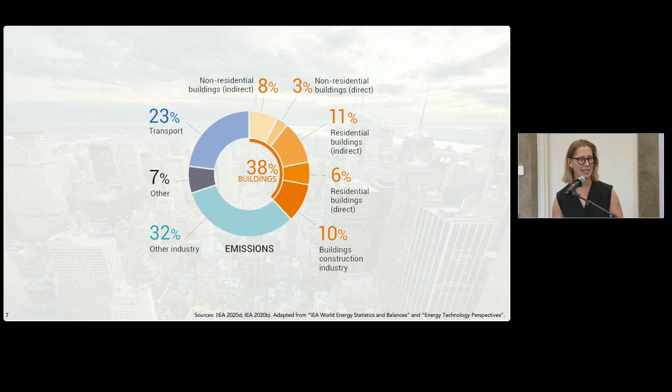So when it comes to problem solving and eating, I like to go for the biggest slice of the pie. So we've seen this statistic before, but I'd like to remind you that 38% of global energy-related emissions come from buildings. And within that 38%, 70% of those emissions come from heating, cooling, and lighting buildings. So although it might not always be the sexiest of topic areas, this is one of the reasons why I focus on this area, because we still have a lot of work to do.

So I care about energy in buildings, but is it specifically energy that we care about, or is it something else? Is it the greenhouse gas emissions that come from the way that we source much of our energy that we use today in buildings? Is it utility costs? After all, if we weren't spending this money on energy, we could be spending it on a lot of other things for humanity. Or is it the health impacts of the way that we generate much of that energy that we use today in buildings? And let me talk about this for a minute.

This was a study from 3 UK universities and Harvard School of Public Health that estimated that 1 in 5 deaths globally is caused by fossil fuel emissions. That's 8 million deaths globally every year. Now, you might think that these numbers are kind of aggressive, so we could go back to the prevailing research before this paper came out, which was from the World Health Organization, and it set that number at 1 in 8 deaths annually. So, whichever study you want to look at, fossil fuels are a major public health concern.

So, I would like to argue that we need to provide for the health of the occupants of our building, and also those vulnerable populations who are literally and figuratively downwind from the fuels that we burn to operate our buildings. So this could literally mean the people who are living downwind of power plants, which often tend to be not the most privileged of society. They tend to be the vulnerable population to start with. Or we could be talking figuratively about those future generations who will be impacted by the energy emissions that we put out there today.

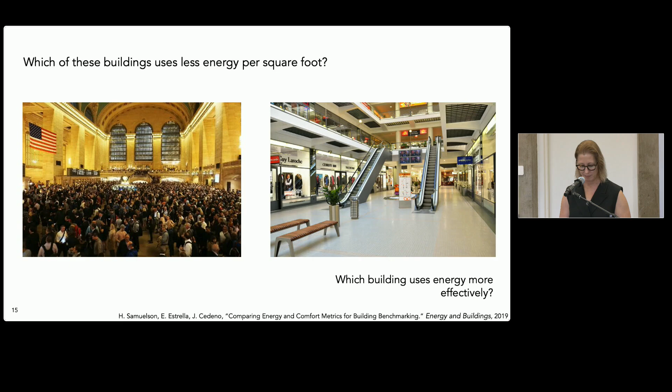But which building uses energy more effectively? After all, we build buildings to house people, to promote our general well-being, not just to efficiently enclose space. So that's something that permeates my work, especially my energy work, and it's something that we should keep in mind. And considering energy without occupant health has not worked well historically.

But consider the opposite. Let's take the first generation of the LEED certification system for buildings, the energy and environment rating system. Considering occupant wellness without energy, and thus global health, hasn't worked well either. It was shown with much embarrassment that a number of the first generation of LEED certified buildings were less energy efficient than their non-green counterparts.

And this can be traced back to a few points that were given for daylight and views. Some people might call them overzealous points without caps on the upper limits that promoted all glass buildings and led to this increased energy use and a backlash against the green building movement. So I would argue that considering energy without health has had consequences against the movement in multiple directions.

So much of my research focuses today on buildings and health, and that's a very broad topic area, and I get to teach an advanced elective on buildings and health. But within my research, I narrow it down, and I focus on those issues in buildings that also have a big overlap with carbon performance. So I'm looking for those win-win scenarios, or those big trade-offs, or those big synergies. And so this pursuit has led me to focus, to some extent, on heat vulnerability, or thermal resilience in buildings.

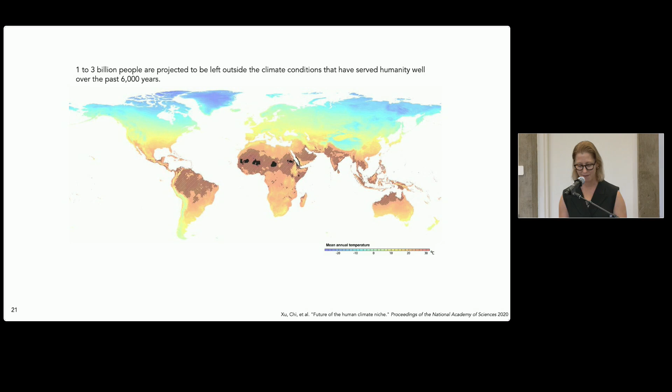So I'm going to talk about a project where we were addressing both energy and heat vulnerability. So in this project, we were developing a framework for architects that's meant to be used in architecture firms to think about and include energy considerations in that fast-paced early design process. And so what we were showing is how you could simulate numbers of different considerations to see which of them might be the most important, like the shading design, the window size, etc.

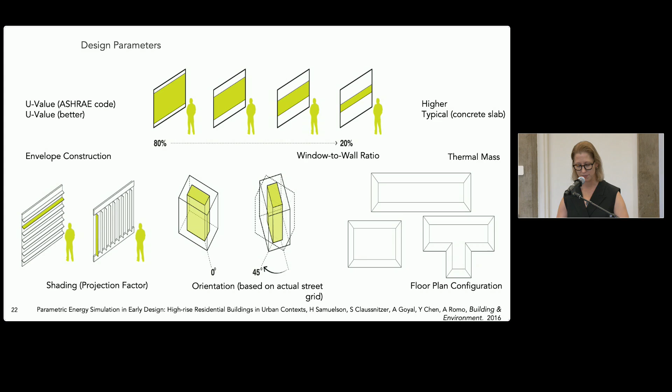And so here's some of those results. And we produced a very simple sensitivity analysis method that could be used by architects to understand before they put pen to paper maybe, which are the big decisions that they need to think about in the design. And it turned out in this case, window size was one of the biggest, as well as the selection of glass type. And spoiler alert, these come up over and over and over again in my research as really important design decisions that architects need to make that affect health issues and also affect energy issues.

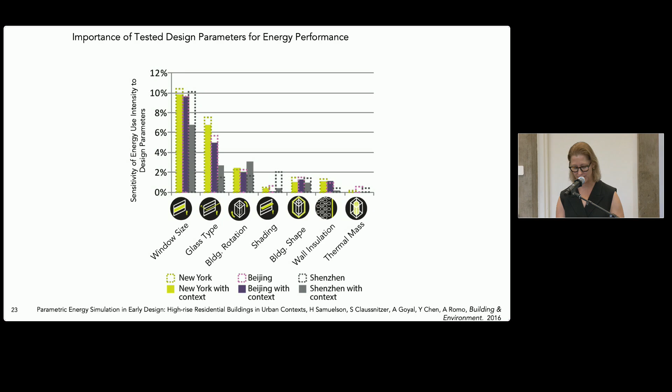But we also wanted to look at something called passive survivability in this study, and I think that this paper helped to really popularize this term, passive survivability, which is the ability of a building to protect its occupants in a power outage from extreme thermal conditions. And so this was important to us because we had seen the headlines from Hurricane Katrina where hospital staff had to use furniture to break out windows in hospitals because the patients were suffering from extreme high heat after the hurricane when they were dealing with a power outage.

And also, two of my co-authors on this paper lived in their apartments after Superstorm Sandy without power for almost 2 weeks. So we think that it's important that buildings be able to provide healthy indoor environments even without power. Now, some of these temperatures might not be a problem for many of us in this room, but these higher temperatures are shown in the health literature to significantly increase risks of stroke, asthma attacks, heart attacks, and especially for vulnerable people who are already sick or who are very old or very young. So that's why we care about keeping these temperatures as close to comfort conditions as we can. It's really a safety issue.

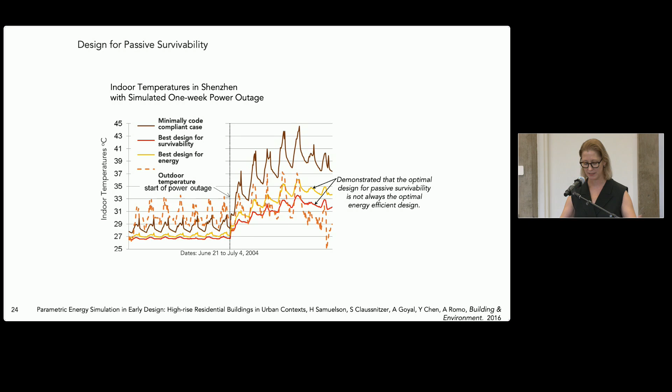But one thing we also demonstrated was that actually optimizing for passive survivability was not the same as optimizing for energy. So the yellow line and the red line are different here. And that was interesting because that was not the prevailing thinking at the time. The prevailing thinking was that if you design for energy efficiency, you would be designing for passive survivability, but they don't totally overlap. And surprise, surprise, one of the areas where they don't overlap is in window design. So it turns out that more glass tends to be a problem in terms of energy. But more openable area tends to be a benefit when you're overheating and you need to open the windows.

So there's a few architects who have thought about other ways to address this, like our Carpenter Center down the road, or this 2226 building in Switzerland, which has openable panels that aren't glazed. Then I'm sure you could come up with other solutions. Or maybe we just need to do more with less. If we have windows, we should make as much as possible of that area openable.

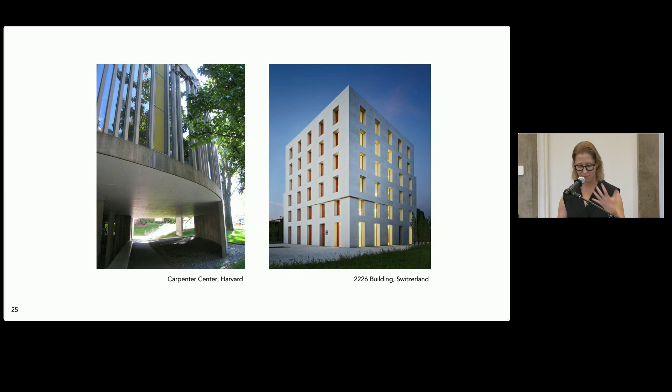So another project we did was we wondered about how does housing impact vulnerability to heat in a population. So many municipalities and governments are trying to map heat vulnerabilities to prepare for heat so that they can allocate resources like planting street trees, like building cooling centers, doing calling campaigns, or handing out air conditioners in a heat event.

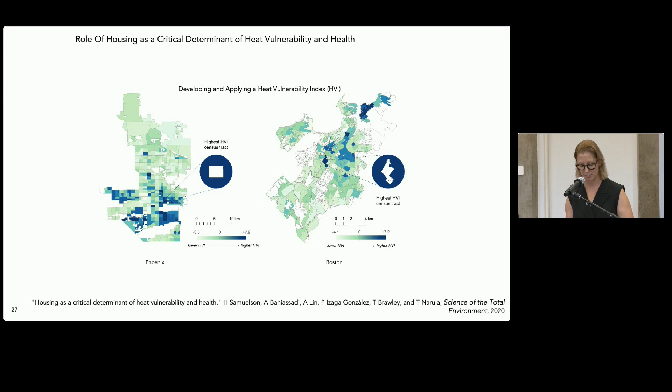But we wanted to know, okay, so we see that housing is missing from this consideration of heat vulnerability. How much does that omission matter? So we followed all the best practices that we pulled together from literature, and we mapped vulnerability in 2 cities, Phoenix, which is very hot, and Boston, which is where we live. And we found the most vulnerable census tract. So then we documented the housing that shows up in those neighborhoods, and then we simulated them.

So we did thousands of combinations of building simulations, and we looked at kind of a mildly hot day and how the indoor temperatures might be different due to the housing design. And lo and behold, we found that housing matters a lot. So even using this conservative approach, we were able to show a major temperature difference between the quote good housing and the bad housing. And the numbers were enough to, according to the public health literature, significantly affect people's risks of these health outcomes that I talked about, like heart attack and COPD, asthma, et cetera.

So we felt that governments were missing this major component, housing, the relevance of architecture to heat vulnerability. So we suggested some solutions in this paper, but it's a pretty hard problem to solve due to the availability of the data. So this problem had been nagging at me for years, and I think just this year, I realized that we have the technology to come up with a better solution.

So it turns out that we have access to 550,000 energy models that are statistically validated to represent the US residential building stock. They were never really meant to be run by the public, so they're not the most user-friendly of tools, but over 3 generations of master's students, we've built our algorithms to run these models, and we're the first group to use them to test resilience. So that's what we're doing here. We're testing the resilience of the US housing stock to a heat event and a power outage.

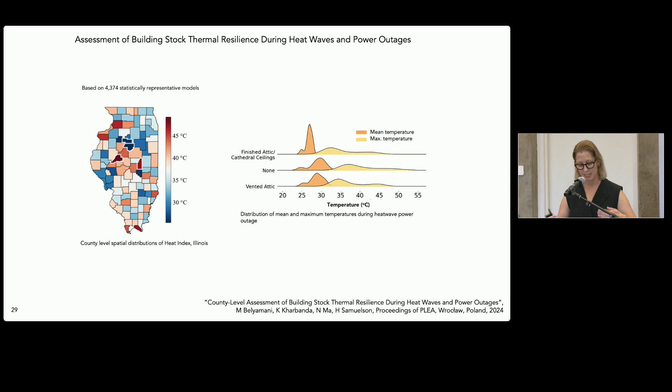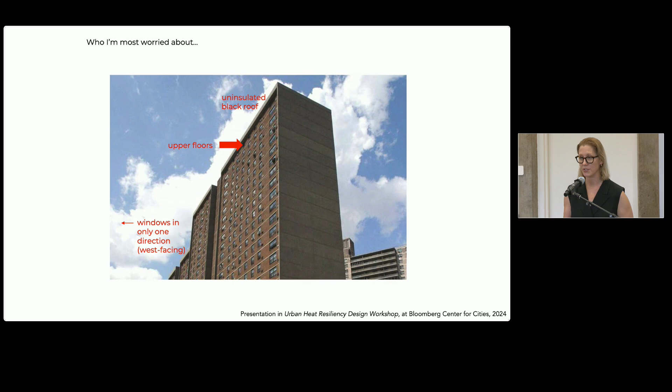So we also performed a series of studies that I'm going to just summarize right here, thinking about the co-benefits of building energy and heat resilience upgrades. So architectural upgrades, and what could they do for buildings beyond just saving energy? So one of the things we found is that in our data set of single-family homes, upgrading them, for every $1 in direct utility savings, which, by the way, this is the whole conversation in my world. This is what fuels building upgrades: what's the cost-benefit analysis of that upgrade, how much energy would you save?

And so we were just trying to look at, well, if you're a government, then it's not just about cost savings to the owner, it's about cost savings to society. So at that time, we were able to apply the social cost of carbon, but also from the literature, what are the beneficial health impacts that we can quantify? So if my building is not using 1 kilowatt hour of electricity from this coal-fired power plant, there's a certain amount of SOx and NOx and other pollutants that are not entering the atmosphere. And the public health literature has quantified for us what is the dollar savings in terms of asthma visits to the hospital that we don't need, that kind of thing.

And so we were surprised to find that in our cases it was 40 cents for every dollar of just what we could quantify at that time. So that was really exciting to show the relevance of these architectural upgrades. We also found that upgrades could increase the hours that are comfortable for window use, thus improving indoor air quality. Okay, so think about you're in your apartment, it's a day that starts out cool and it's warming up. Probably in the morning, you're perfectly comfortable with just the windows open and that small breeze. But as it gets hotter and hotter, at some point you think, this is not comfortable anymore, and you close your windows and you turn on the air conditioner. And in most of our apartments, that means we also cut off the fresh air supply.

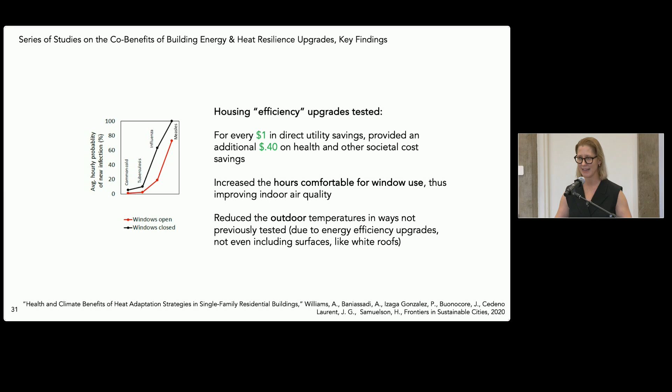It was kind of like this big, wide Phoenix Boulevard. So I feel confident that it would show up even more here. But what we did was we paired the prevailing technology at the time, which was an outdoor canopy model that models all the heat flows. It was validated for Phoenix's climate.

And we went back to that vulnerable neighborhood, and we found that, lo and behold, they were planning a public housing development there. So we took the design of the public housing development that was code compliant at the time. We said, what if we made it better, one level, with more insulation, better windows? What if we made it even better by adding phase change materials? Could those architectural changes that have not shown up in the literature actually change the outdoor temperatures?

And the answer was yes, it did. So even with wind blowing away the heat, it still changed the temperature at ground level. Not a lot, but enough to register, and approximately the same amount as what you could achieve by switching from black roofs to white roofs, which is considered the gold standard of addressing urban heat island. So we were able to show that basic architectural decisions could be as relevant as changing from black to white roofs. And so we thought that was pretty exciting.

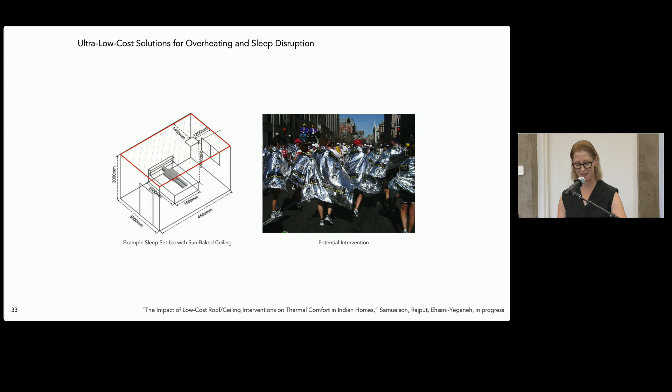So we're testing all that right now, and the findings are positive. So I think that this is potentially a viable solution. And by the way, it doesn't have to remain ugly like that. This could be behind a finished ceiling, but I'm purposely trying to look at very low cost interventions for populations that need that. And so one of the grant proposals that went out today would be working with other faculty and trying this out in various pilot cities to see how this might work.

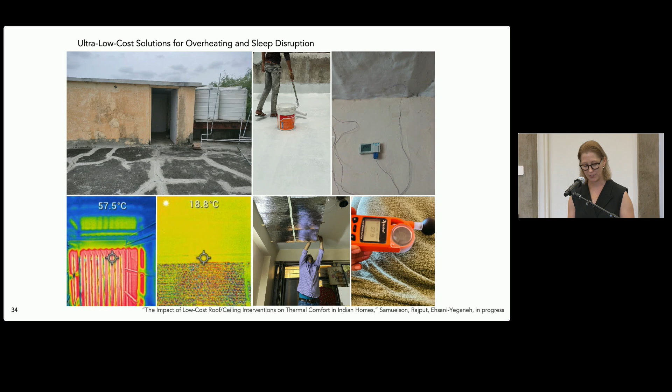But coming back to the US, another project that we're embarking on that I'm very excited about, I'm the PI on this project, but I'm partnering with the medical school. And we're interested in vulnerable older adults and heat vulnerability. So we're specifically focusing on adults with mild cognitive impairment. This means that they are able to live on their own, and they do, but they have some impairment.

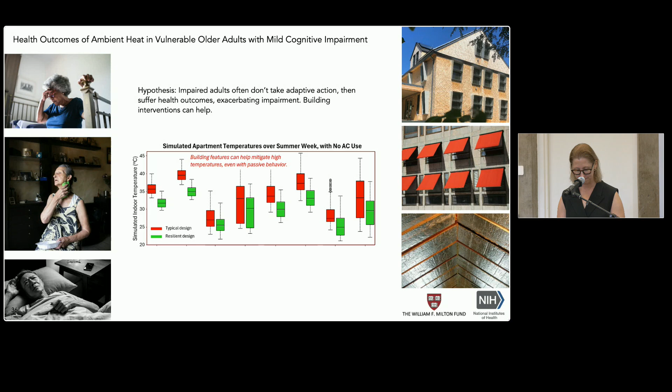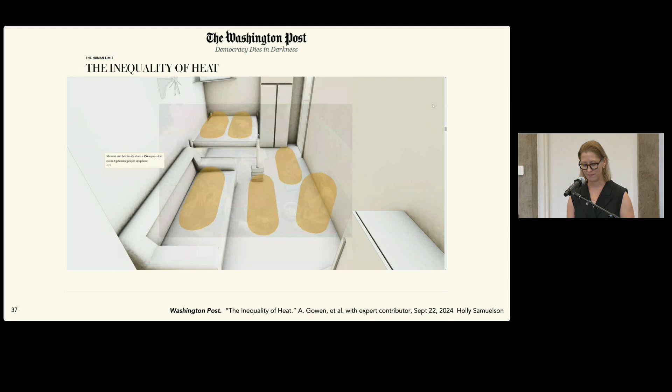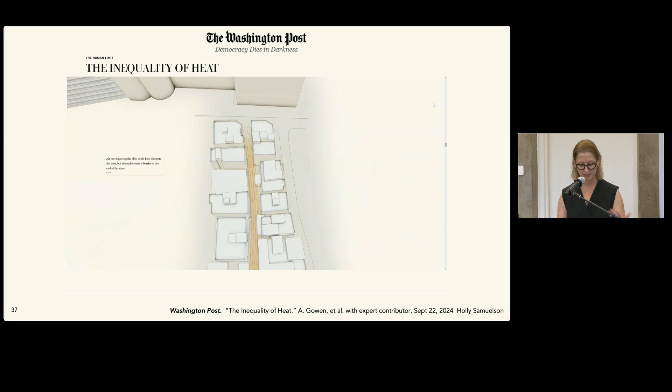And I had an opportunity to talk through these issues with the Washington Post, which they incorporated into these figures for an article about the inequality of heat in India. So I was able to talk about some of these issues that affect why one family might be more exposed to heat extremes compared to another building design somewhere else. For example, if you're down at the bottom of this urban canyon, you don't get that cooling breeze down there, et cetera. And so I encourage you to check this out. The video doesn't quite do it justice. You get to scroll through and it animates and explains all of these physics phenomena that are happening.

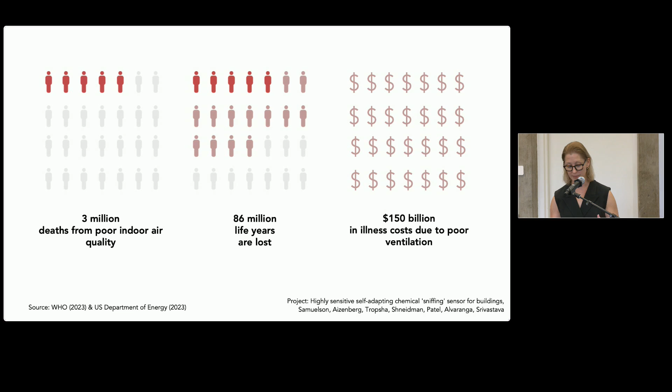So in addition to heat vulnerability, another area of overlap between carbon performance in buildings and health performance is with indoor air quality. So this is something else that I study. Why indoor air quality? Well, there are 3 million deaths annually from poor indoor air quality, 86 million life years lost annually, and in the US, $150 billion lost in illnesses due to poor ventilation. So just speaking of volatile organic compounds, they increase the risk of diseases such as cancers, asthma, fetal heart malformations. And why indoor air? Well, we spend 90% of our time indoors. And these vulnerable populations are probably spending more time than that indoors. And we know that indoor air can be 2 to 100 times more polluted than outdoor air.

So why don't we have good indoor air? Well, part of the reason is because of this energy and health conflict. So it costs money to heat and cool air. And so if you're moving in more and more outside air, that's more and more energy that you need to spend and pay for. And this conflict was something that I got to talk through on this video with the Wall Street Journal, talking about why we don't have great air quality in our offices today, what we could do about it, and what might be the future of office design.

The ventilation in buildings is really interesting. I think we're kind of in the Wild West at the moment. Think of ventilation kind of like walking up to your refrigerator every day and throwing out a random portion of food because you don't know which food in your refrigerator is going bad. That's exactly what we do in buildings today, right? We ventilate the indoor air with outdoor air, but we might not be doing it at the right time, in the right place. We're kind of just guessing.

So that's something that I'm working on with Anna and Joanna Aizenberg at SEAS and a group from UNC, where we're developing a new kind of sensor that can better sense the pollutants that are in our indoor air, specifically VOCs, which the industry has a terrible time sensing with accuracy right now. So why is this important? Because we can ventilate our buildings more effectively. And how are we doing this?

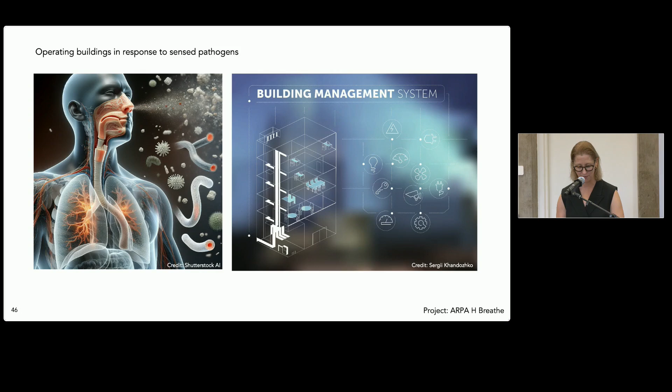Okay, so let me bring it back a little bit more to architectural decisions that we deal with every day. So what we do with architecture affects the risk of growing mold in our buildings. Why do we care about mold? Well, mold in homes is correlated to increased risk of allergies, asthma, and immunological reactions, among other things. One study showed that the annual health costs of just the asthma that's attributable to dampness and mold in buildings is costing the US at least $5.3 billion a year.

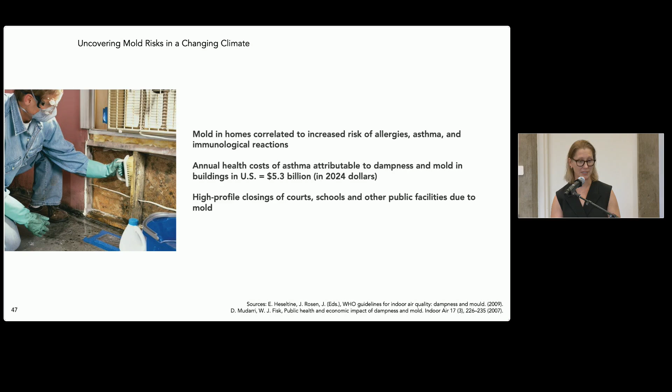And there's been a number of high-profile closings of courts, schools, and other facilities due to mold. So in an ironic turn of events, in May, the Cambridge Public Health Department had to close much of their own offices due to mold. So all of the remaining employees had to squeeze into their remaining office area, and so they had to rotate which days of the week they could come in. So this is why mold is important in buildings. Now, some of this has been showing up in the literature, and that's not necessarily what I'm dealing with. I think there's something new that hasn't been discussed.

So let's think about the way that we design building envelopes. It is dictated by building codes, which are based on a historic definition of climate. So what I'm showing is a very typical New York or Boston wood-framed wall, and the red dashed line is a vapor retarder. And in the 1990s and 2000s, it was either required or encouraged to be a very impermeable vapor barrier.

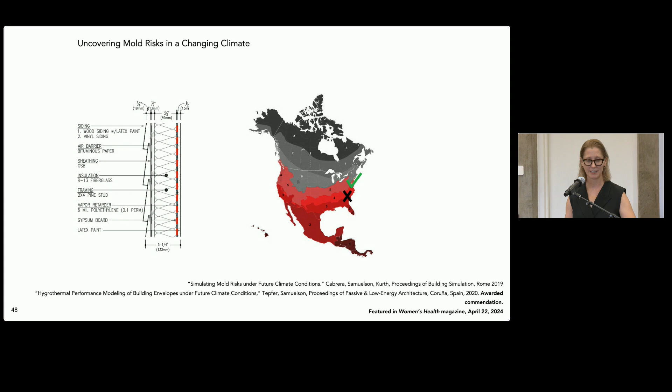And you would never build this wall with this impermeable vapor barrier on the inside of the insulation in, let's say, Georgia. So what's going to happen to all of these existing buildings in New York when its climate becomes a bit more Georgia-like? So that's what I wanted to look at here. And it turns out that there's a way we can simulate this.

So we can use hygrothermal simulation, which has been around for years. And we can add in a simulation of mold growth, which is based on years and years of empirical studies from a group from Finland. Now, I will admit there's a lot of uncertainty here, so I'm not saying that my results are definitely going to happen. But I'm saying that my results prove out my hunch, which means that maybe we need to investigate this issue more.

So what we're showing here is 3 climates, DC, Philadelphia, and New York. And we're simulating that wall in today's climate and future mid-century climates. And what we're showing is a major increase in the probability of mold growth in these walls. And the interesting thing here is that this is not due to climate shocks like flooding and storm events. This is due to the everyday weather, just because the hotter air can hold more absolute moisture.

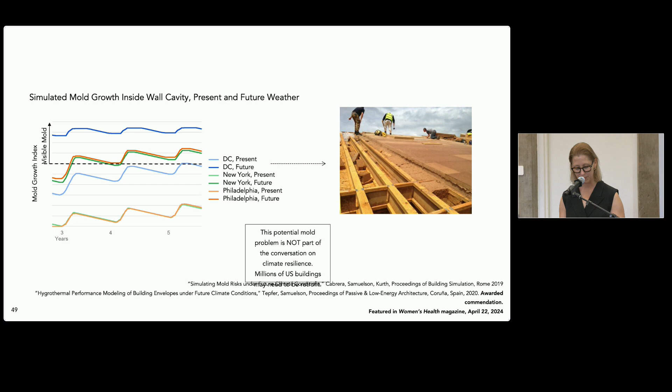And so this is just the climate stresses, which has not been part of the conversation on climate resilience so far. So possibly it needs to be part of the conversation. Now, our latest paper is coming out soon, but this work was in 2 conference papers, and it was featured recently in Women's Health magazine in their article on mold.

So one of the other issues that I deal with, the last one I'm going to talk about in terms of building and health, is simply reducing fossil fuel use, because we talked about how that is a health impact. So this is something that I get to teach in my required classes and my advanced electives. So here's a project from one of my classes that was also entered into an international competition where the team was optimizing their building to perform better.

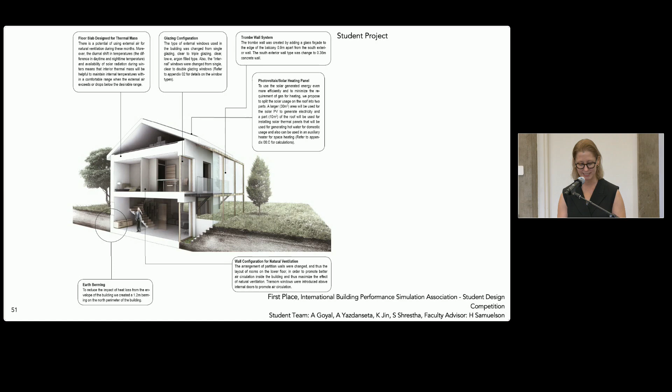But the interesting thing was that they were kind of asked to just optimize the systems. But they said, no, we're going to back up. We know the relevance of architecture. We're going to redesign the building first. And I think that was how they were able to win this competition.

Here's another project from one of my advanced electives. It was the first time the GSD had entered the Department of Energy's solar decathlon competition. And there's a bit of a learning curve there, but I was really proud of this group because they did end up winning an award in their category. Again, using architecture. So they had this well-designed, thoughtful solar chimney.

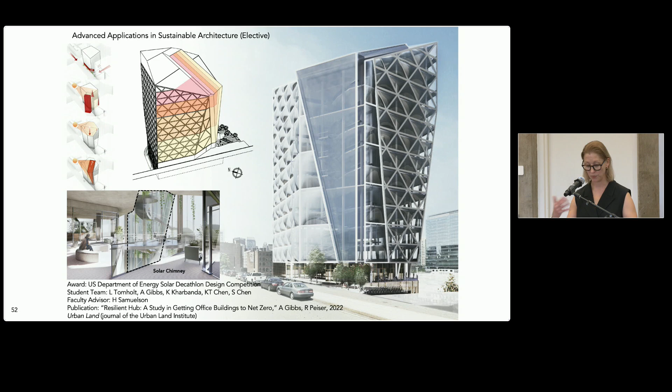They had an interesting dynamic facade that stretched using pneumatics, ETFE, which would change the solar properties of the facade and let in more heat when they wanted and block more heat when they wanted. And they did a number of other great things in this project. And I'm really proud of this team.

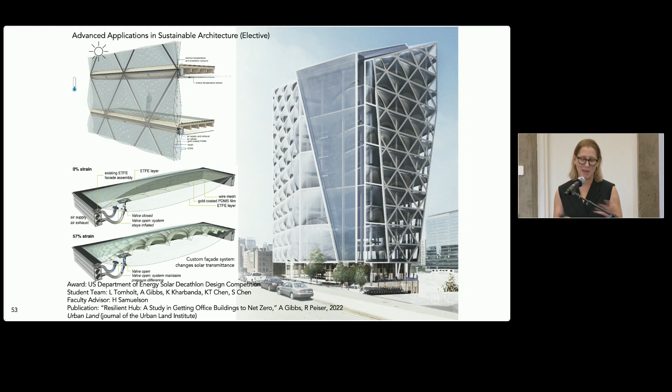And I think while I'm bragging, I should brag a little bit more about Kritika Kharbanda. She did a thesis with me in 2023, and she's now the global head of sustainability for Henning Larsen Group, which is a 700-person architecture firm known for sustainable design. So I'm really proud of her, and I think that we have a number of students like that have global leadership positions in sustainability. And I think it just goes to show that some of these projects aren't always about the outcomes, but maybe the leaders that they help produce. Although I'm not going to take credit for all of Kritika's successes.

But speaking of great students, here was another project where we were taking machine learning techniques from other fields and applying them to buildings. And I think one of my contributions and one of my strong points is to be able to recognize how advanced computational techniques, whether it's machine learning or simulation, can be applied to sticky problems in buildings. So what we were doing in this project, along with Ali McCauley and others, was thinking about how do we control the building's HVAC system and windows.

So traditionally, we use what we're calling heuristic controls, which means that there's a set of rules. If it's this temperature, do this. But what we are doing here is saying, aha, there's these new techniques. Let's see if we can apply it to buildings where we can learn over time what works well and what doesn't.

So we'll set up a system of rewards and say, okay, if you can produce better energy savings, if you can produce better comfort, you get a reward. And over time, the system learns what works and doesn't work and starts to control the building that way. And so that's what was done here, and it's very exciting because we were able to find 23% energy savings,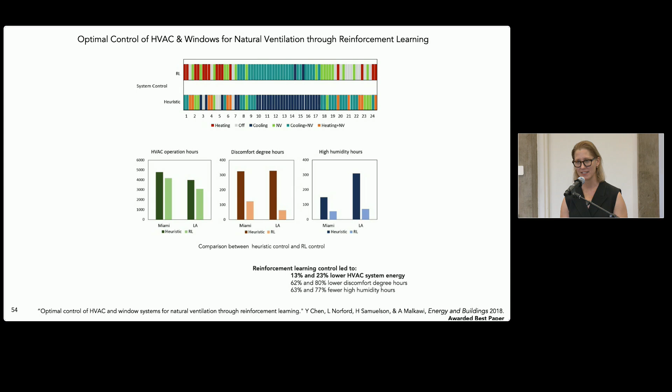80% comfort savings. For someone who works in energy for a long time, it is very hard and very expensive to find these kinds of energy savings in buildings. So this was really an exciting finding. I'm even more excited about this research that I'm going to show now. And I apologize, it's a little hard to explain in the time that I have, but I'm so excited that I refuse to take it out.

I think that one of the biggest challenges facing society today is decarbonizing our electricity supply because of the challenge of misaligned energy demand and energy supplied by intermittent renewables like solar. So what I mean is wind, solar, it produces electricity when the conditions are right. That might not be exactly when neighboring users want to use that electricity, and it always has to match or the grid goes down. So we can solve this problem with batteries or major improvements to transmission lines, and we will, and we need to.

But we can't solve all of the problems, and we're trying to figure out as a society what to do about that. And I'm here to say that I think architecture can play a significant role, and I don't think this is being talked about yet. If this issue is being talked about in building research, it's mainly focusing on smart building controls. So getting signals from the grid and deciding, do we need to run our clothes dryer right now? And I think this is really important, and we need smart building controls.

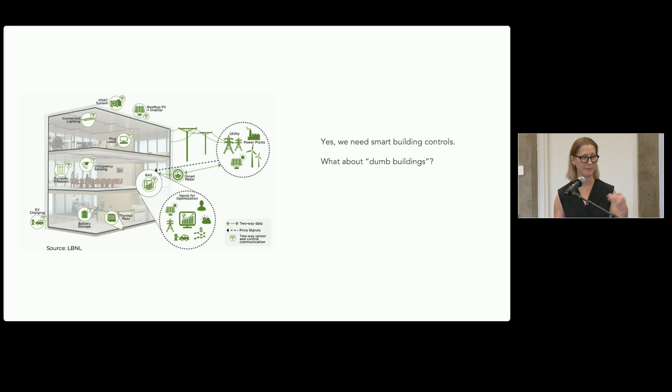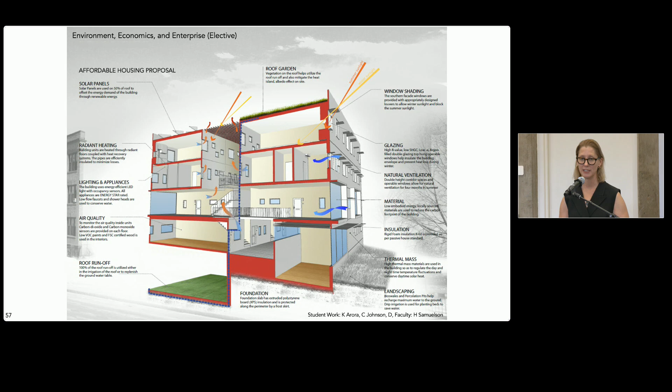But I'm here to ask, what about dumb buildings? What I mean is, I think that basic architectural design strategies have a role to play. So things like my students are showing in this project here, like window design and selection and shading, etc. I think that we can provide beneficial electricity demand management while also making our buildings more beautiful and comfortable.

To do this, we need to think about what are some of the major changes that are happening in and around buildings. And I'm not sure that all of these trends have made it into the world of building design yet, and I sure know that they haven't made it into the world of building design policy. So some major changes that we're facing is the electrification of heating in our buildings. So we are moving from burning natural gas to heating with heat pumps, and this has some changes. One of which is that suddenly we need to care about winter.

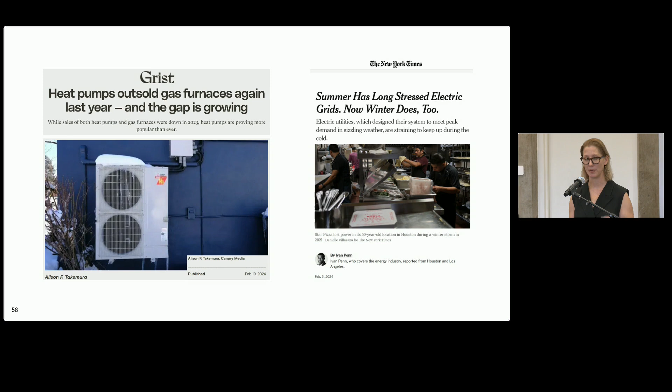So even in cold climates, our electricity grid is most stressed in the summer, and our building codes have been thinking about that. But in about the 2030s, places like New York and New England are going to shift to a winter peaking grid. So suddenly we need to care about winter a little bit more. I would argue that we also need to care about winter a little bit more if we think about the way that these air source heat pumps work. They have to work harder at extreme temperatures. In a cold climate like ours, when are the temperatures most extreme? In winter. So I think we need to take that into account when we're trying to find that sweet spot of design decisions, such as window design.

So our window design right now, whether we like it or not, and most of the time we don't, is mandated by a set of building codes. And in a cold climate like Boston, New York, and colder, ideally we would want our glass to let in heat in the winter, and keep out heat in the summer, but we only get to pick one glass.

So our building codes have mandated what that maximum solar heat gain that can pass through, they've mandated what that value should be. And it's a sweet spot that's based on historic conditions. And I'm telling you that those historic conditions are changing, and we need to think about that as we build buildings and select this glass that's going to be in our buildings for decades.

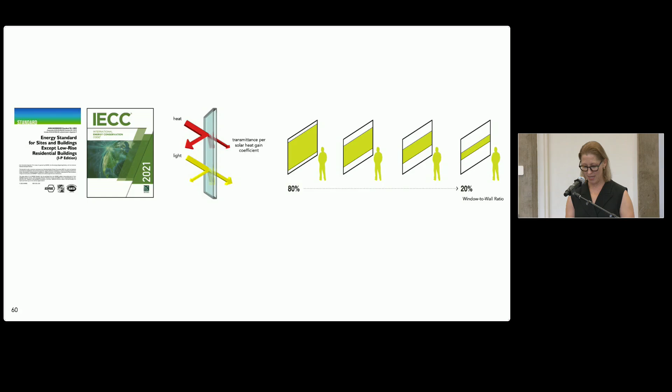The other thing is that these building codes tend to be very broad brush, which maybe worked when we didn't care that much. But now that we're trying to solve climate change and we're getting very stringent in our rules, I think that we need to have a finer grained approach to what we're mandating in what buildings.

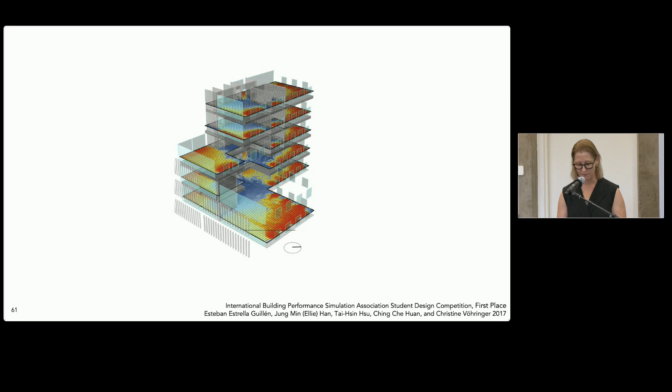So for example, the building codes have one set of rules for all windows, no matter what orientation they're facing. So here's another student project where they did a great job of thinking about the solar orientation and realizing that windows should be different on different facades. And so here I'm demonstrating that.

And part of it has to do with the sun being so low in the sky in the winter that the heat and the radiation is hitting that glass more directly and penetrating through, whereas those high summer angles are glancing off. This is not the same pattern that you would get on an east or a west or north-facing window. This is why I think we need different rules for equator-facing glass.

Let me get back to what I was saying about these trends. Another trend is that solar power is expected to grow significantly. So what does that do? It's really interesting to think about the pairing of solar power and windows, because they're both dealing with the same phenomenon, which is the sun.

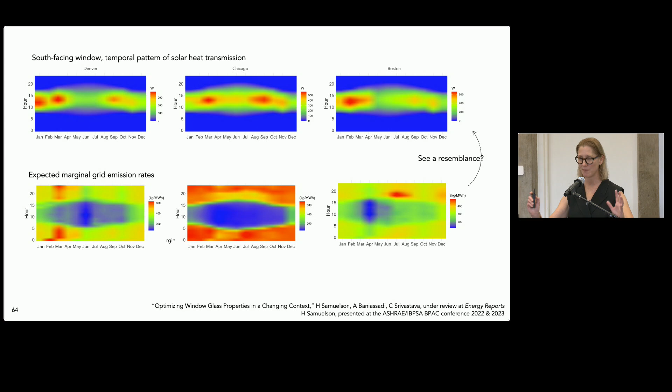And if I dove into this further, I would be able to show you that just with normal building materials, our buildings are storing enough heat that if we let in more heat from those windows, we could be reducing that heating load even into the night, even into those peak load hours in the winter. So, okay, when you put all these things together and you do the same methodology that the building codes are using to create the building codes in the first place, but you try out some of these other patterns, you can see that rethinking window design.

So in this case, I'm optimizing windows, and I'm going way beyond what's allowed by code in their prescriptive requirements. In these cold climates, like New York and colder, this is a mandate for single-family houses, and in our climates and colder, this is for all multifamily housing. If we break code and we let in more heat in our windows, we reduce our heating demand. We also increase our cooling demand, but it has a net benefit even today.

So we were able to find in these heat pump buildings electricity savings up to 6%, and peak load savings, because the peak now on the building is in the winter. So peak load savings of 11%. So again, these are huge numbers that are really hard and expensive to achieve in buildings. So this is looking at today's grid.

What if we look towards the future and those anticipated grid emissions rates as we get more solar on the grid? It turns out that it's even better because we are using more energy at the right time. So we still would need batteries, but maybe they would need to be smaller. We only need to store energy for a few minutes or a few hours rather than days. And the marginal CO2 emission savings could be up to 12% in our tested designs.

So what does this all mean for architecture? Well, if any of you are an architect working on a residential building of any kind, in our climate zone or colder, talk to me. I don't think you should follow code for your south-facing windows. I think we should do a performance-based simulation approach.

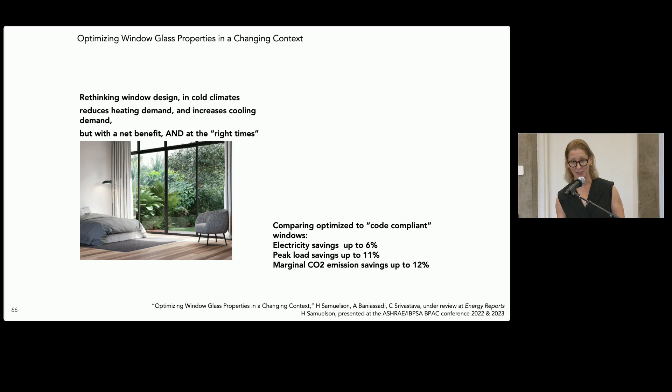I think we should try out different windows that maybe have a higher solar heat gain coefficient. I think you'll save energy. I think you'll be able to have higher visible light transmittance. The windows might actually be cheaper, and we could ultimately save energy and carbon.

So, I haven't tested this yet, but I think that we're able to show that we can make south-facing windows net winners again. And so I suspect that we could also allow for larger windows on south-facing cold climate residential buildings, which could make a lot of architects and building owners very happy.

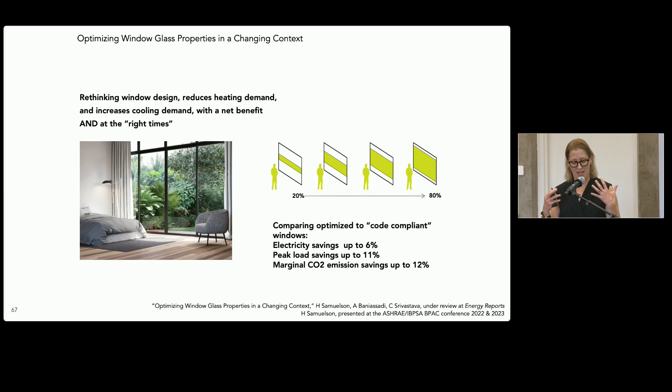So, I wasn't able to get into all the details of this nuanced analysis, but I was able to give a talk on this that's recorded from the Harvard Vice Provost for Advances in Learning and the Salata Institute, so I invite you to check it out if you're interested. And I'm very excited that Jim Stock is interested in this research. He's the head of the Salata Institute. He's an economist that thinks about how we are going to achieve all of these solutions across our different industries.

And he said something to me that was really interesting. He said, architecture doesn't always have to follow what's happening on the building grid. What you're doing is actually making solar power more cost effective. Because right now, already today, I would say it's either 2 or I think it's 4% of all the nodes on our whole electricity grid and all the hours, we have a negative wholesale price, which means that producers of electricity need to pay money to produce it.

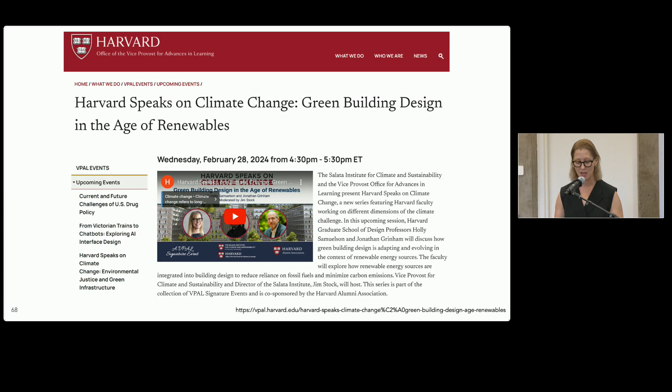Or what they do is just turn off the switch from their wind power or their solar panels because it would bring down the grid. So that's not making solar power cost effective right now. That's not helping. And so if we were able to use that energy, we could enable solar power to be much more effective and cost efficient. So I think we don't always have to be the chicken, we can be the egg. Buildings could be helping to decarbonize the grid and also taking advantage of the decarbonized grid.

So I hope that I've been able to show that building energy upgrades aren't always all about utility cost savings and benefits to the building owner, that the additional benefits to society are significant. And before I came to Harvard, I was a consultant on buildings. I got to help improve a handful of buildings at a time. And I think the really exciting thing about doing this research at the GSD is, in a way, we get to be consultants on all of the buildings.

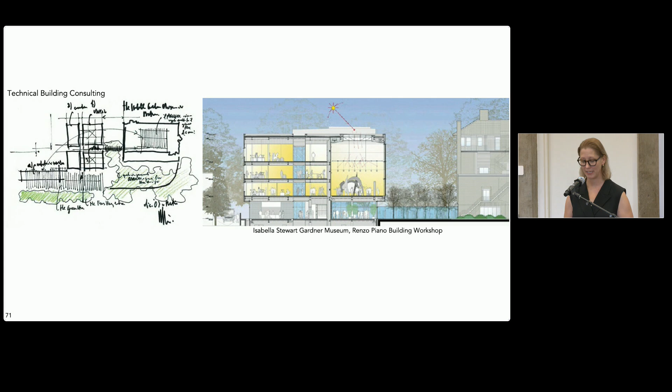So I think that our laws are changing really fast right now, and they have to because of climate change. And I know, Grace, you've experienced this and others, that they're changing so rapidly that we're not always getting them right. And I think that it's important for our knowledge to keep pace. So I think that by doing this research, we can help to influence our building codes, our incentive programs, our zoning codes, so that we can provide the knowledge to get them more right.

And I know that I've talked about a number of dire circumstances. I think I've said death more times than one cares to hear in a GSD presentation. But I've been at this for a lot of years, and I've seen our industry kind of crawling towards progress. And actually today, with the new laws, our cities taking the lead and saying, forget you, federal government, we'll take the lead, the technological innovations, this pace of change has accelerated so rapidly that I am actually very hopeful. And I'm very excited to be at the GSD where we can help lead this change. So thank you very much.

Thank you so much, Holly. This is so helpful because we're actually recording this and live streaming it, so I appreciate that you're talking to the microphone.

So you've mentioned so many interesting things, and I really appreciate seeing this sort of broad spectrum of some of the research. When Erica Naginski and I taught Ecofolius, the studio and seminar, we were surprised to realize that there were a number of students who did not have a kind of handle on first principles. And so it was really hard to jump forward and talk about, let's say, innovative strategies for issues of solar energy and things like that.